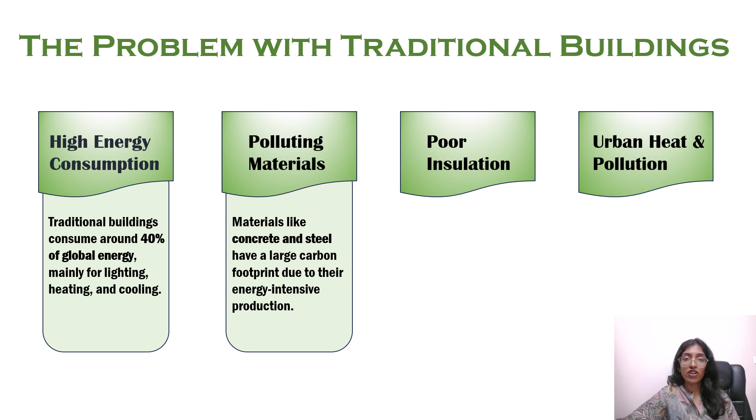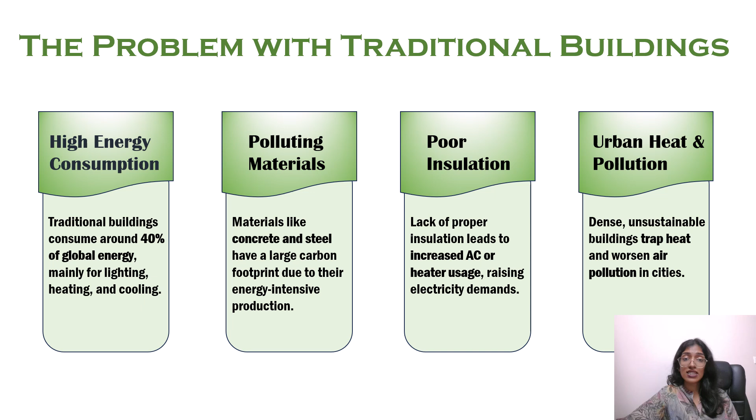Third is poor insulation, the most common issue. Without proper insulation, buildings lose or gain heat easily, leading to more use of air conditioners and heaters, again raising energy use and cost. Lastly, urban heat and pollution become worse with dense, unsustainable construction. These buildings trap heat and block airflow, raising city temperatures and worsening air quality.

Now, what is a green building? A green building is a structure designed to be environmentally responsible and resource efficient throughout its life cycle. The goal is to reduce negative environmental impact and improve the quality of life for the occupants.

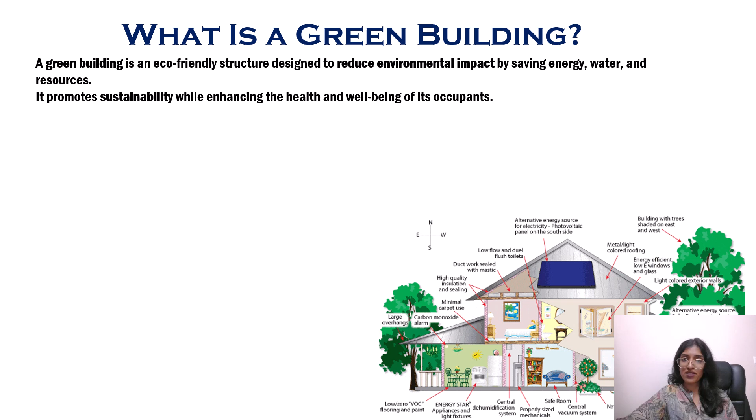There are four core principles that define a green building. Eco-conscious design: the building layout makes smart use of natural resources like sunlight, wind, and shading. Efficient resource use: green buildings conserve energy and water through advanced technologies and thoughtful design. Sustainable materials: these buildings avoid harmful materials and instead use recyclable, non-toxic, low impact products that can be used in a circular economy.

Occupant well being. Design also focuses on good indoor air quality, comfort, natural lighting, and acoustic performance.

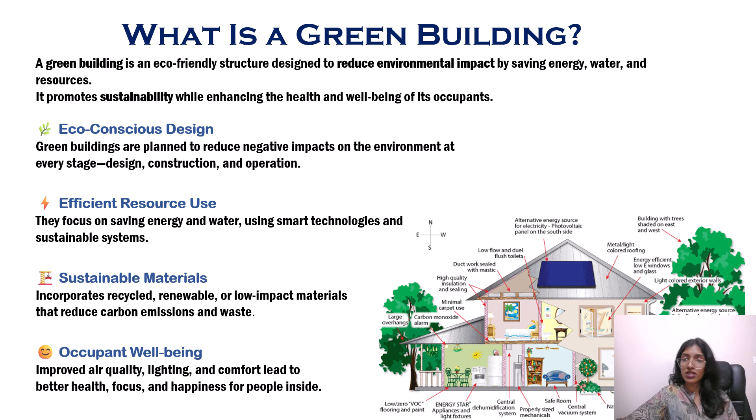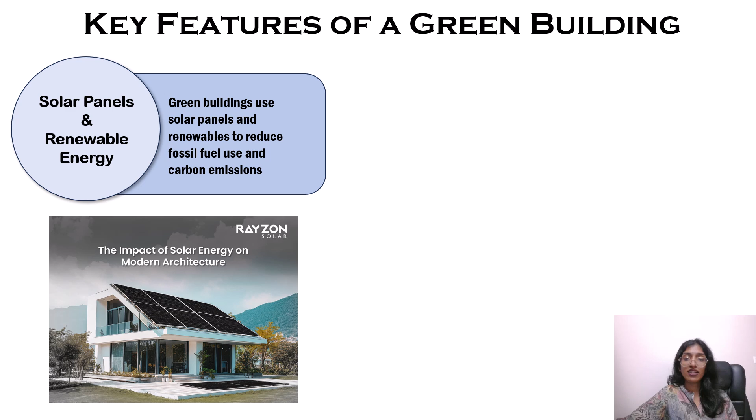Now let's know about some key features of green buildings. The first key feature is solar panels and renewable energy. One major feature of green buildings is using renewable energy. These reduce dependence on fossil fuel, lower electricity bills, and significantly cut down on carbon emission by generating clean, renewable power on site. Green buildings become much more sustainable and cost effective in the long run.

Natural ventilation and thermal insulation allow smart placement of windows, vents, and shading devices. Buildings can maximize airflow and reduce heat gain or loss. Proper insulation helps maintain comfortable indoor temperatures year around, reducing the need for artificial heating and cooling.

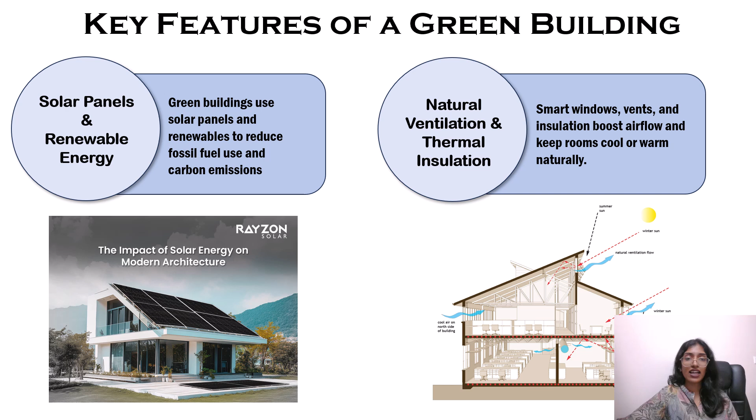Rainwater harvesting systems. Green buildings often include rainwater harvesting systems. These collect and filter rainwater, which can then be used for non-drinking purposes like flushing toilets, gardening, and cleaning. This not only saves water but also reduces the strain on municipal supply systems.

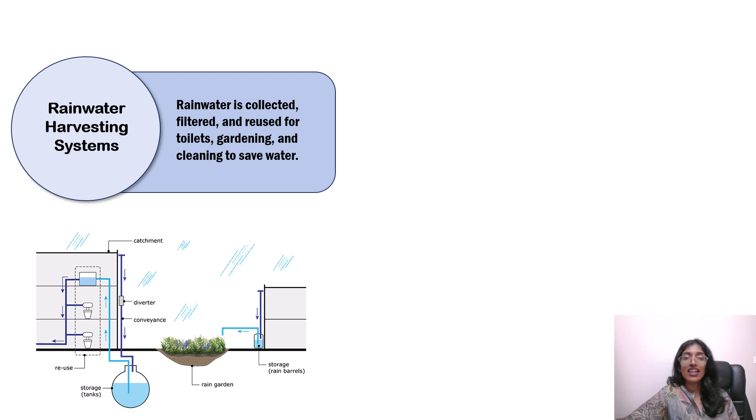LED lighting and motion sensors. To reduce energy use, green buildings use LED lighting, which is much more efficient and lasts longer than traditional bulbs. Paired with motion sensors, lights are automatically turned off when rooms are empty, which further cuts down on energy waste.

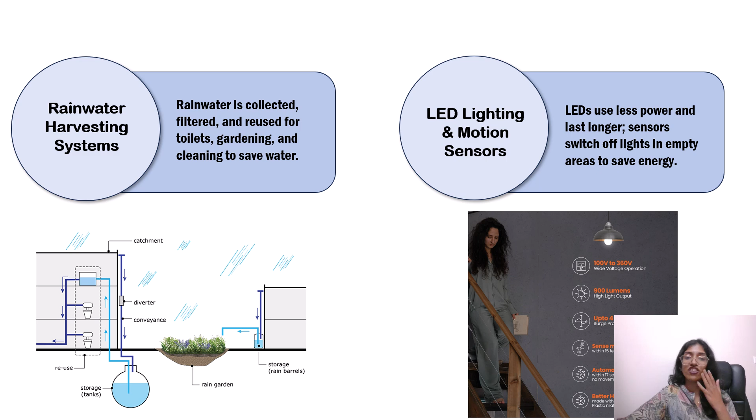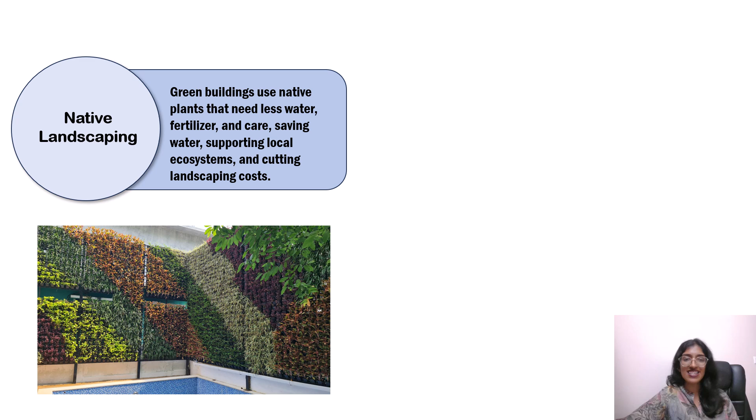Recycled and low carbon materials. These buildings also emphasize the use of recycled and low carbon materials like fly ash bricks, bamboo, and reclaimed wood. They also avoid using substances like VOC heavy paints. This significantly reduces the building's overall environmental impact.

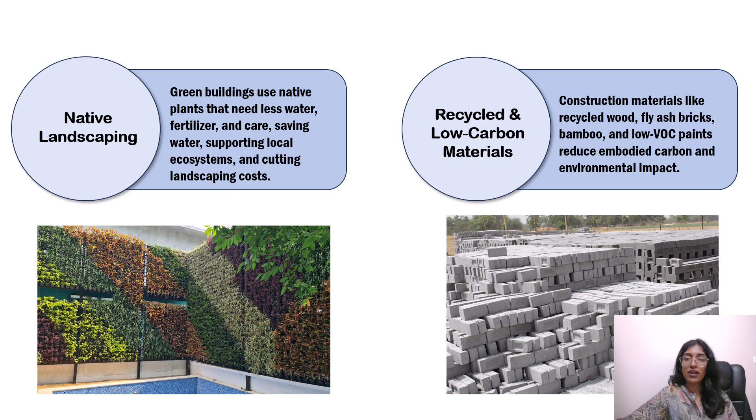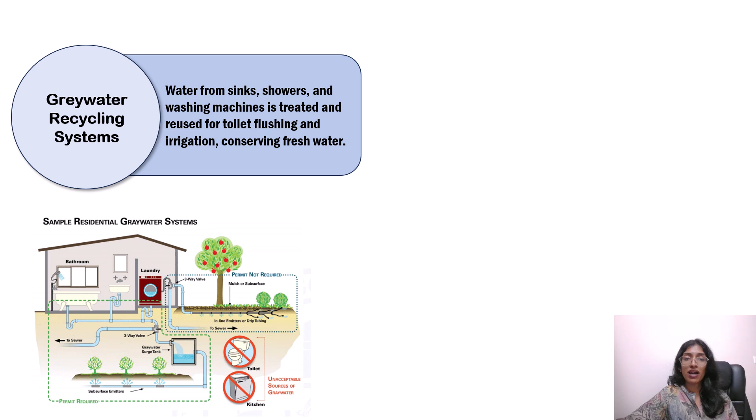Greywater recycling systems: green systems treat wastewater from sinks, showers, and washing machines. Once treated, this water is used for irrigation and toilet flushing. It's an efficient way to conserve fresh water and manage wastewater sustainably.

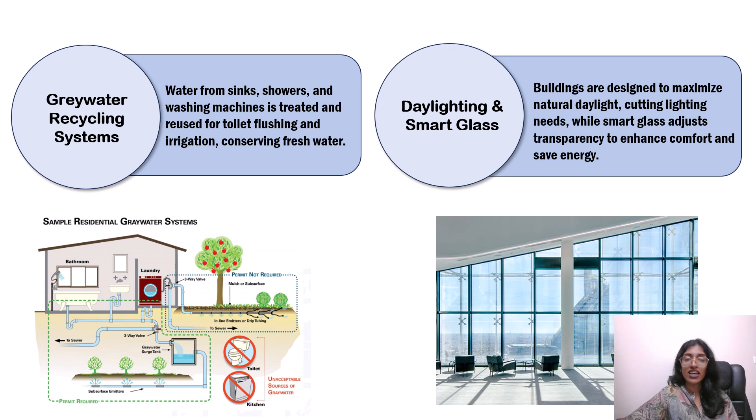Daylighting and smart glass. Green buildings are designed to allow natural daylight into interiors, reducing the need for artificial lighting. Smart glass can adjust transparency to control glare, heat, and light, enhancing comfort while saving energy.

Energy efficient HVAC systems in green buildings use sensors and automation to optimize air quality and comfort while using less power. Smart controls monitor room conditions and adjust ventilation or cooling in real time.

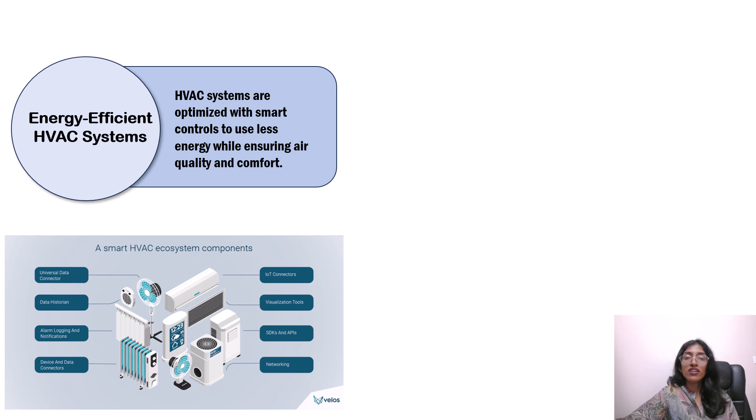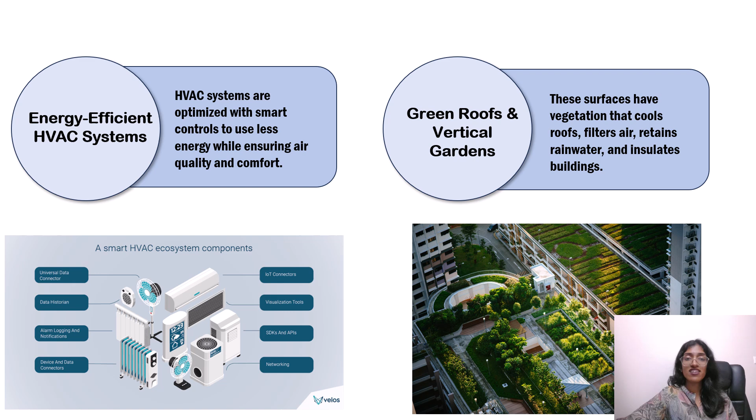Green roofs and vertical gardens are an excellent addition to green buildings. They act as natural insulators, reduce the urban heat island effect, filter air pollutants, and even absorb rainwater. They also create relaxing green spaces in dense urban environments.

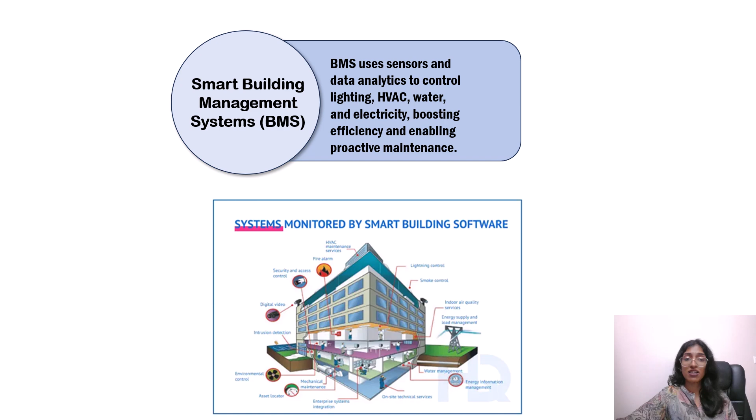Smart building management systems use real-time data to control lighting, HVAC, water, and energy systems efficiently. They help reduce energy waste and allow building operators to maintain performance and comfort through automation and analytics.

Now let's look at some of the benefits of green buildings, starting with environmental benefits. They use 25 to 50% less energy by optimizing natural lighting, using smart appliances, and relying on renewable energy sources. They also save up to 30 to 40% of water through rainwater harvesting and reuse systems. Most importantly, they help reduce the building's carbon footprint.

Traditional buildings are responsible for about 35% of global carbon emissions, while green buildings significantly cut this down. They also generate up to 70% less solid waste, making them not only energy efficient but also eco friendly in every way.

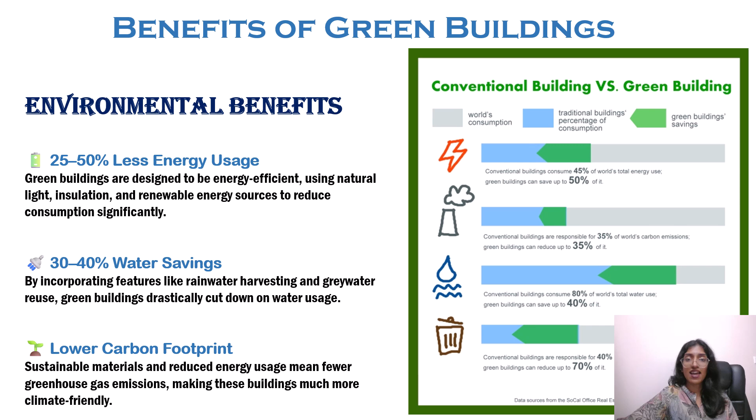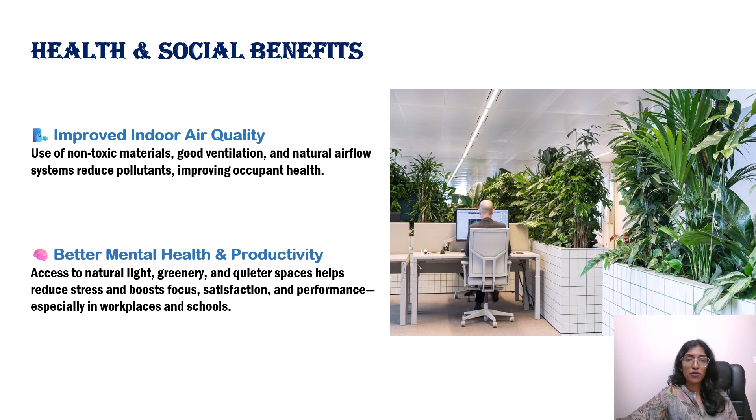Health and social benefits: green buildings are designed for people too, not just for the planet. They ensure improved indoor air quality by using non-toxic materials and proper ventilation, lowering health risks from indoor pollutants. Natural light, greenery, and quiet interiors help promote better mental health and productivity, especially in workspaces and schools. Simply put, green buildings create healthier, happier environments.

Economic benefits: while green buildings have slightly higher construction costs, they offer huge economic advantages. They can lead to an 8 to 10% increase in property value thanks to lower operating costs and high resale demand. Most importantly, they result in lower electricity and maintenance bills. With features like solar power, LED lighting, and smart systems, owners recover the extra cost in just 3 to 5 years on average. So they are not just good for the planet, they're great for your pocket too.

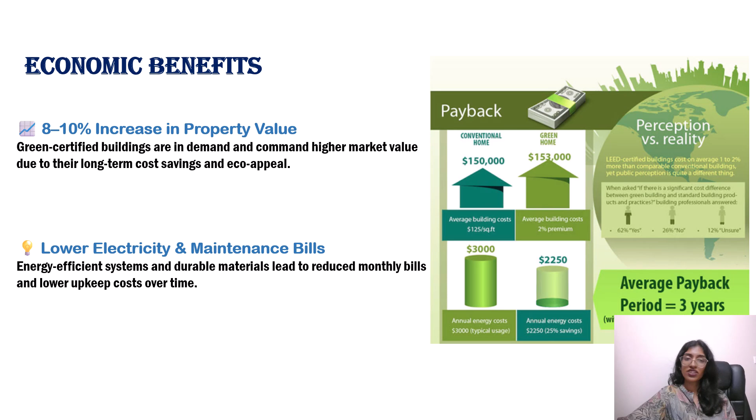Now let's look at one of the famous case studies, the Infosys campus in Mysuru. It is one of the most famous green buildings in India with an IGBC Platinum rating, the highest recognition for sustainable buildings in India.

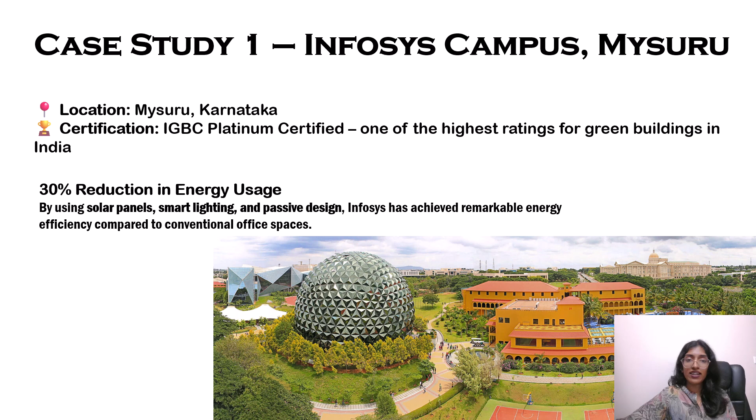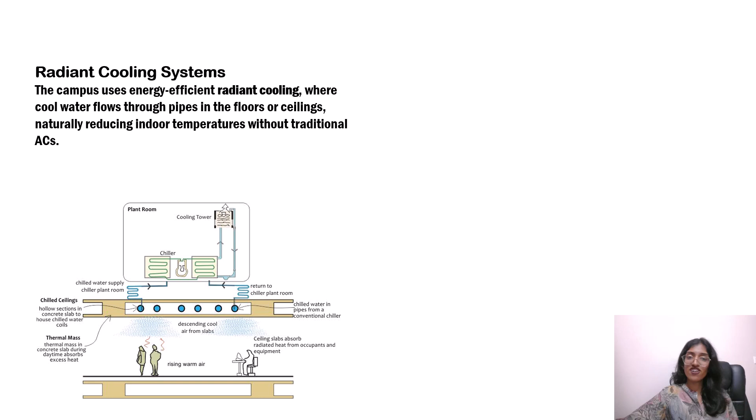The campus incorporates smart lighting and systems that adjust based on occupancy and daylight. Large windows and shading devices allow maximum daylight while reducing heat, cutting down artificial lighting needs. A standout feature is its radiant cooling system, where chilled water circulates through pipes in the ceilings and floors to maintain indoor temperature. This method uses 30 to 50% less energy than conventional air conditioning.

Water sustainability is another strong point. The campus treats and reuses 100% of its wastewater for landscape irrigation, flushing, and cooling. Rainwater harvesting also helps replenish groundwater. Infosys Mysuru is a model of how smart design and sustainability can create efficient, healthy, and eco-conscious workspaces.

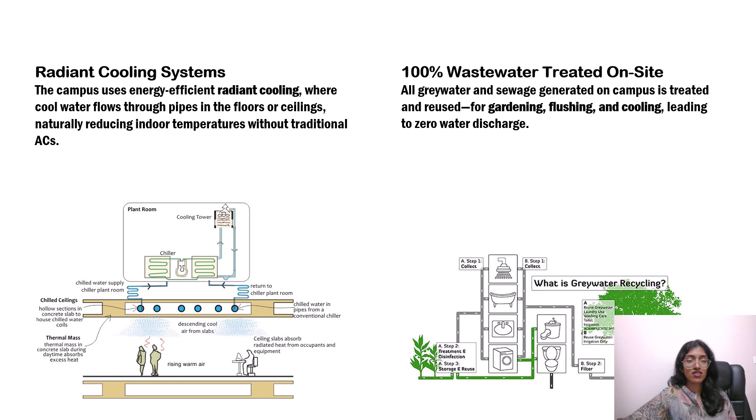Let's look at Edge in Amsterdam, often called the world's smartest and greenest office building. It spans about 40,000 square meters and holds a BREEAM Outstanding certification with one of the highest ratings ever, 98.4%. What makes it truly unique is its 28,000 IoT sensors that monitor light, temperature, air quality, and occupancy.

These sensors auto-adjust systems in real time to maximize comfort and reduce energy usage. Employees use an app to control lighting and climate at their desk and book workspaces or parking. This connectivity enhances both efficiency and personalization.

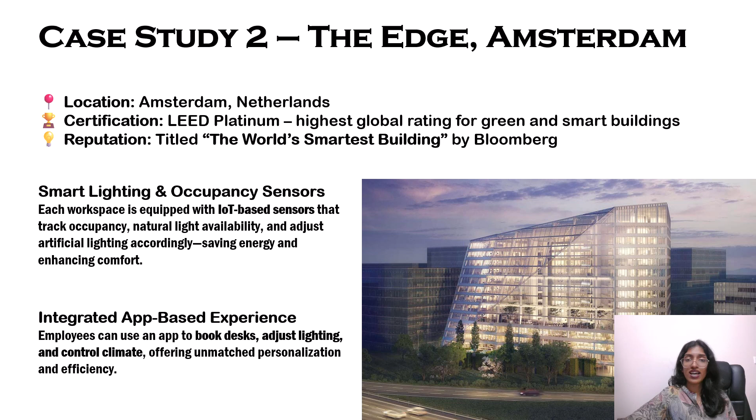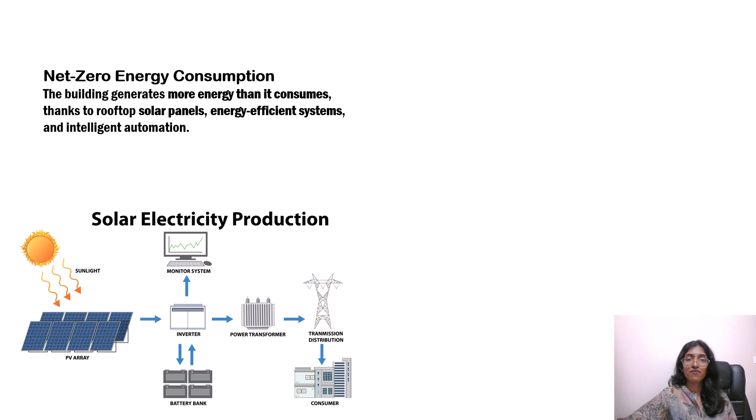Edge also generates its own power using solar panels, making it a net positive energy building. Rainwater is harvested for flushing and irrigation, while green spaces improve air quality and aesthetics. It is a prime example of how smart technology and green decisions can redefine modern workspaces.

Now let's look at the last case study, CII Godrej Green Building in Hyderabad. It is India's first LEED Platinum building, setting a benchmark for green architecture in the country. It was built in 2004.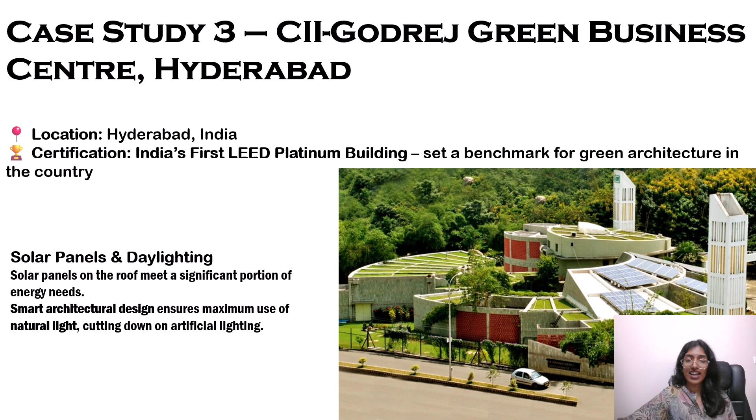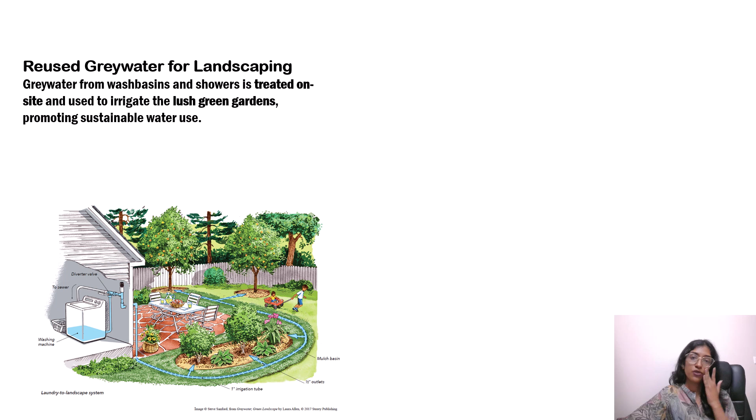The building uses solar power, light shelves, and north-facing glazing to reduce heat while maximizing daylight, cutting down electricity use significantly. Its rainwater recycling system and low-flow fixtures lead to a 40 to 50% drop in water use. Locally sourced materials like fly ash bricks were used in construction to reduce the carbon footprint. Smart systems use automation, sensors, and thermal mass to reduce energy use, improve air quality, and maintain comfort efficiently.

This building proves that sustainability can be both functional and inspirational.

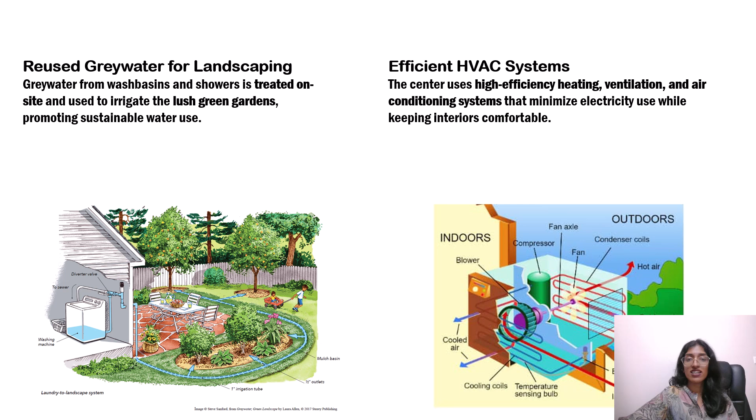But is green building really worth the cost? Many people worry about the higher initial cost because green buildings typically cost 10 to 15% more than traditional buildings. But this is a very short term view.

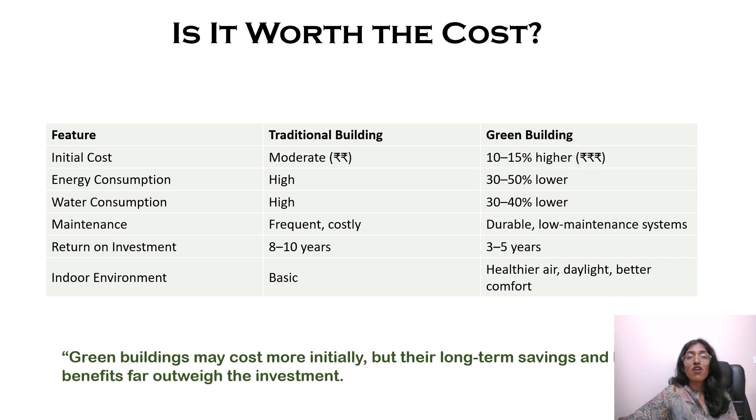Green buildings consume 30 to 50% less energy, 30 to 40% less water, and need less maintenance due to better systems. They offer a faster return on investment, just 3 to 5 years compared to 8 to 10 years for conventional buildings. Plus, the indoor environment is healthier and more comfortable. So yes, green buildings may cost more upfront, but the long term savings and health benefits far outweigh the investment.

But how can we really promote green buildings? We need to make sure it is not just an exception, but becomes a norm. For this, we need a collective effort from the government, industry, academia, and public.

Firstly, government initiatives play a really important role. They can help with tax rebates, faster clearances, or subsidies for renewable energy and sustainable materials, encouraging builders to adopt green practices. In India, many states have offered extra floor space index to projects that meet green norms.

Next, we have green certifications for real estate such as GRIHA, that is Green Rating for Integrated Habitat Assessment, and LEED. These certificates help builders meet eco standards and give buyers confidence that they are investing in a sustainable project. Promoting these can shift market preferences towards green projects.